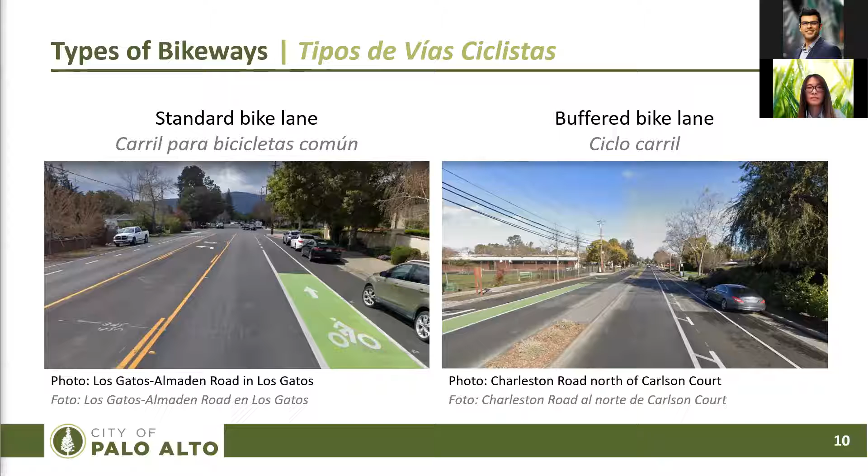The next potential treatment is a protected bike lane, sometimes referred to as cycle track. This provides a space for bicycles.

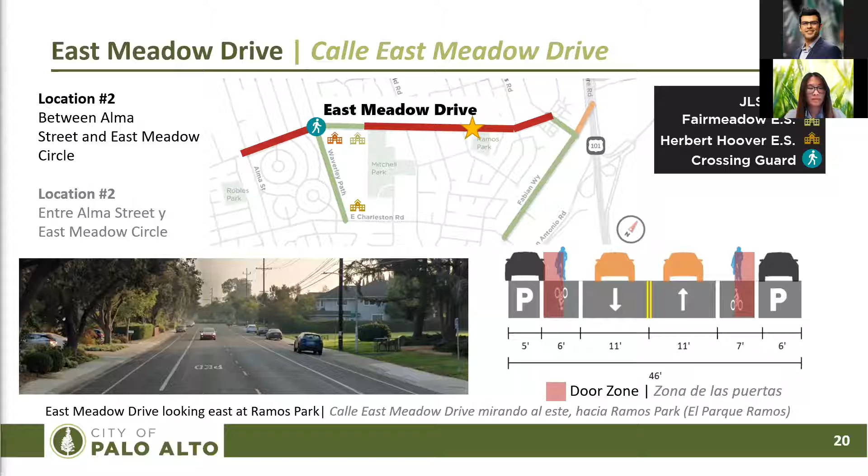Hay que tener en cuenta que, según la opinión de la comunidad, la ubicación del aparcamiento podría cambiar de una manzana a la otra. En Palo Alto se ha utilizado el estacionamiento en un lado de la calle para dar cabida a las instalaciones para bicicletas en la avenida California, cerca del túnel de Avenida Cal, y en la avenida Colorado, en el centro de la ciudad.

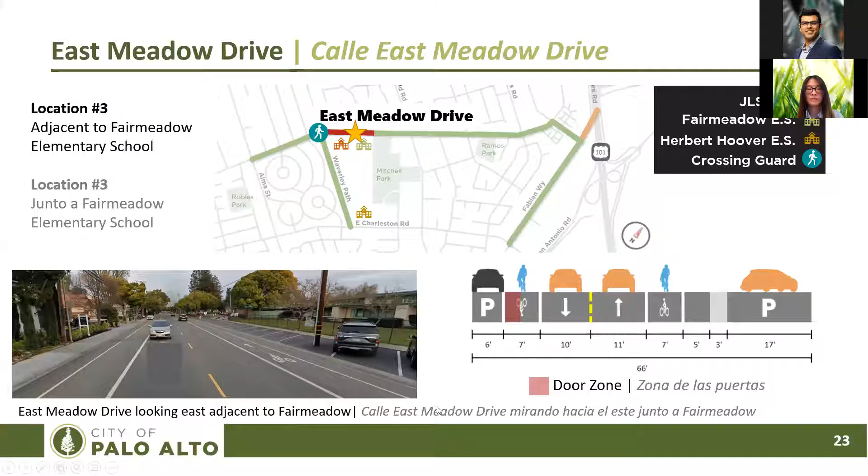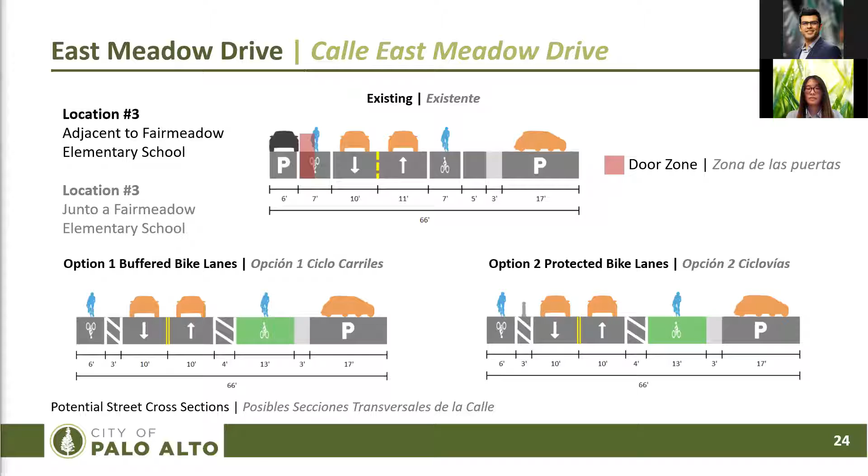Les mostramos aquí las mismas opciones, pero desde otro punto de vista. La imagen de abajo a la izquierda muestra los bolardos, así como los buffers en el carril bici, en el que los automovilistas deben cruzar para aparcar. La segunda opción muestra una ciclovía en dirección oeste con bolardos, y en ambas opciones mantienen el acceso de bucle de recogida y devolución de los estudiantes frente a la escuela. En la segunda opción, abajo a la derecha, hay puestos de estacionamientos junto al bucle de recogida y entrega.

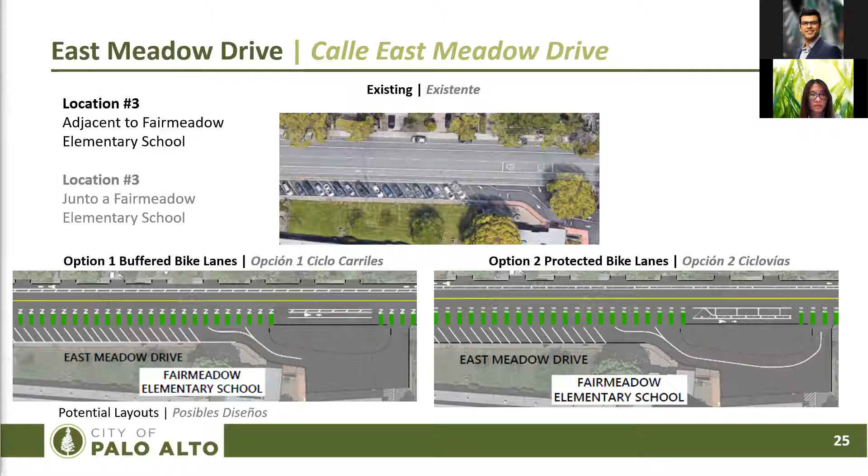Nuestro último segmento en nuestro paseo virtual es el sendero multiusos de Waverley, que conecta East Meadow con East Charleston, junto a las escuelas de JLS y Herbert Hoover. El sendero existente está lleno de baches, con superficies irregulares en algunos lugares, debido a la intrusión de las raíces de los árboles.

Justo al lado del sendero también hay actualmente una valla que puede interferir con el manillar de las bicicletas. Estos dos problemas han dado lugar a caídas y colisiones para los estudiantes en bicicleta.

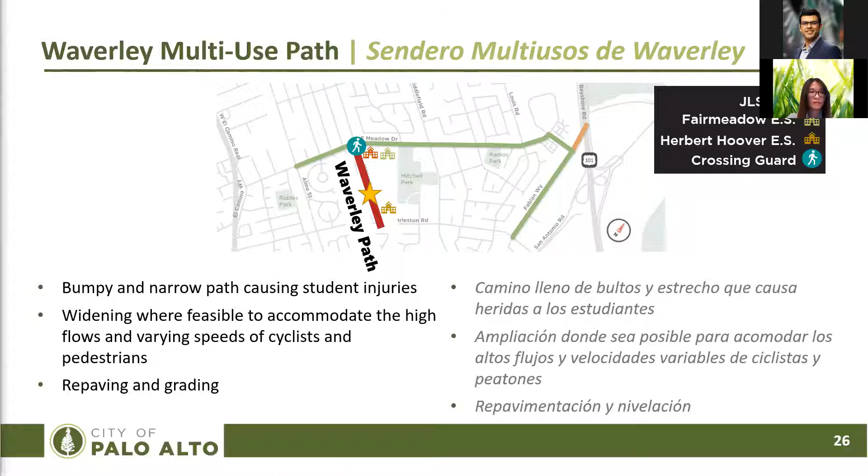El actual sendero multiusos de Waverley tiene baches y superficies irregulares en algunos lugares debido a grietas y las intrusiones de raíces de árboles, como pueden ver en las fotos. Además, justo al lado del sendero hay una valla que puede interferir con los manillares de las bicicletas. Estos problemas, combinados con la alta demanda durante los periodos de máxima afluencia escolar, han provocado caídas y colisiones de estudiantes en bicicleta.

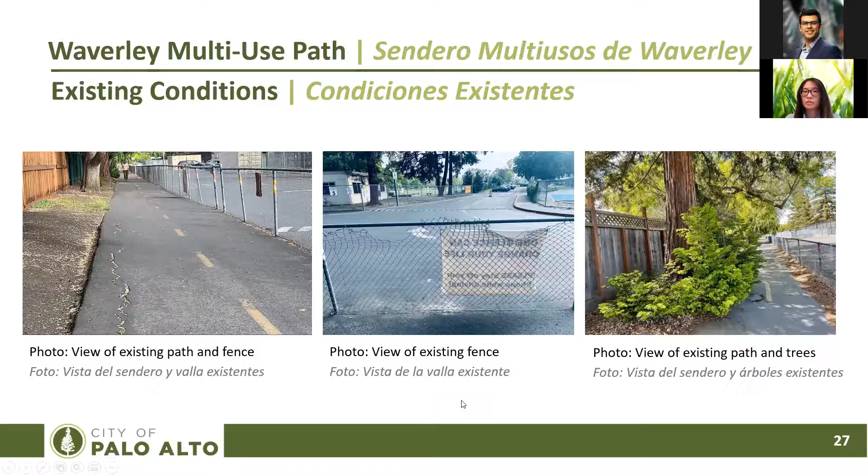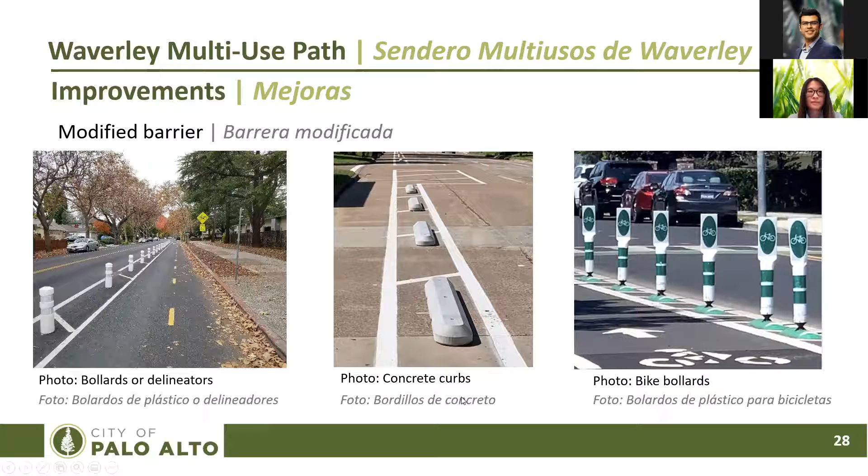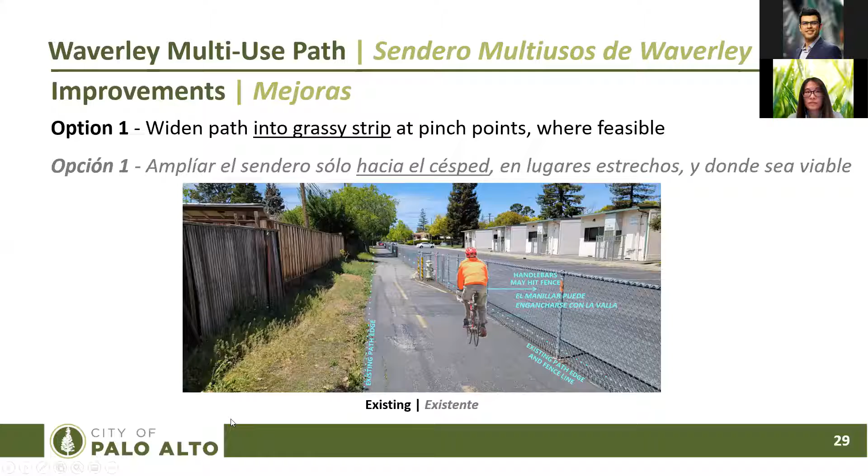Una forma de abordar algunas de las preocupaciones existentes sería eliminar la valla y sustituirla por otro tipo de barrera. Dado que la actual valla está a la altura del manillar, su sustitución por algo más corto mejoraría la experiencia de los ciclistas. La primera opción para las mejoras del sendero multiusos de Waverley consistiría en ensanchar el sendero hacia la franja de hierba que se aleja de la escuela.

Que está al otro lado de la escuela, cuando sea posible, para dar cabida a flujos mayores. La repavimentación y el rectificado del sendero también podrían proporcionar una superficie más suave, especialmente en los puntos estrechos como junto a la boca de incendios que se muestra aquí. La ampliación del sendero permitiría más espacio para los ciclistas.

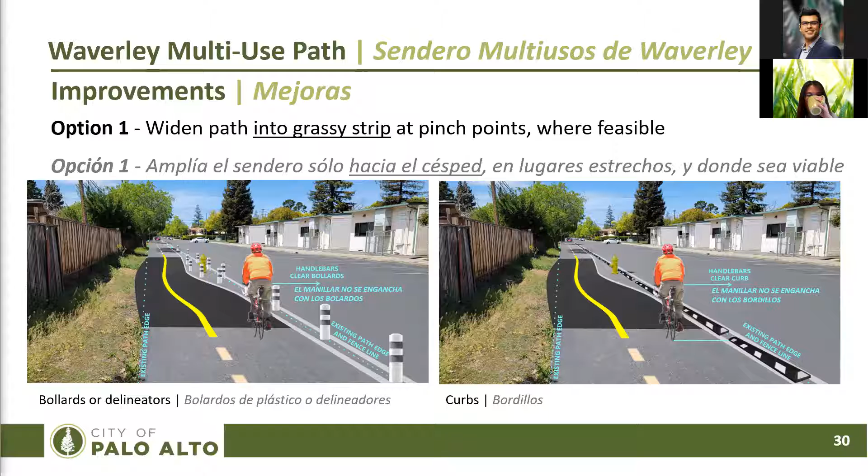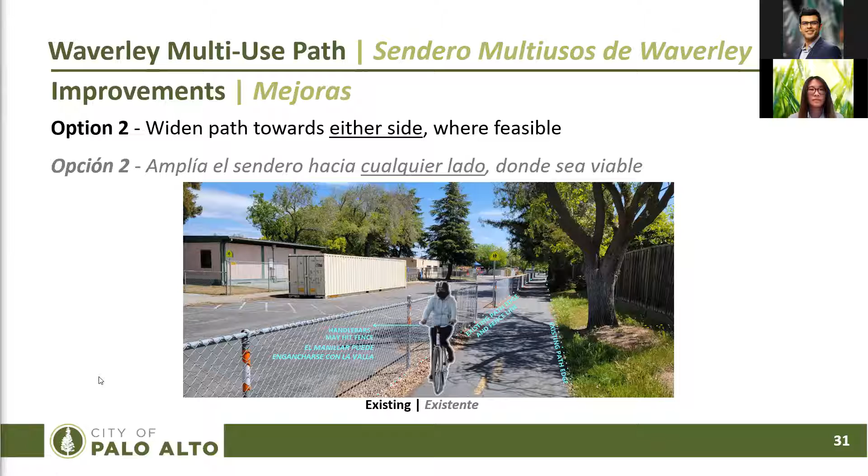Esta imagen muestra el sendero existente junto a los árboles en una zona un poco más al sur que la imagen anterior. En lugares como este no sería factible ampliar el sendero hacia la franja de hierba sin afectar a los árboles y la vegetación existente, por lo que no se podría ampliar el sendero hacia las franjas de hierba en lugares como estos.

Con lo cual hay otra opción para las mejoras del sendero multiusos de Waverley. La segunda opción consistiría no solo en ensanchar el sendero hacia la franja de hierba de forma similar a la opción 1, sino que también consistiría en ensanchar el sendero hacia la propiedad del colegio cuando sea posible, para dejar espacio adicional junto a los árboles y la vegetación existente.

Como se ve en estas dos simulaciones, la segunda opción seguiría permitiendo ensanchar el sendero hacia la franja de hierba donde haya espacio disponible lejos de los árboles y la vegetación. Pero la separación entre el sendero y la circulación de vehículos se desplazaría en algunos lugares para permitir el ensanchamiento en todo el sendero. Si se desea, cualquier modificación del sendero hacia la propiedad escolar requeriría la coordinación con el Departamento de Bomberos y el Distrito Escolar.

Al igual que con la opción 1, estas dos simulaciones muestran el aspecto que tendría el sendero con bolardos de plástico o separadores de tramos de acera reflectantes. Pero también podrían considerarse otros materiales. Estas barreras también son más cortas y reducirían los conflictos con los manillares de los ciclistas.

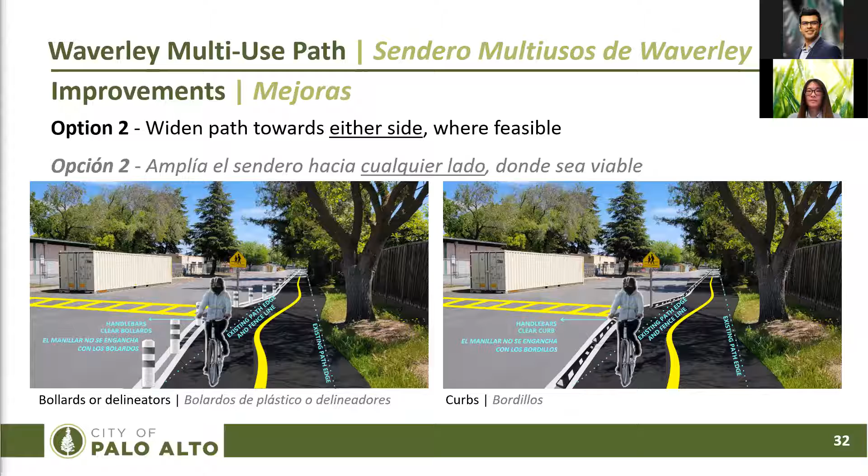Entonces, ¿cuáles son los siguientes pasos? Dedicamos un minuto a repasar los próximos pasos y qué otras oportunidades tendrán todos ustedes de compartir sus opiniones.

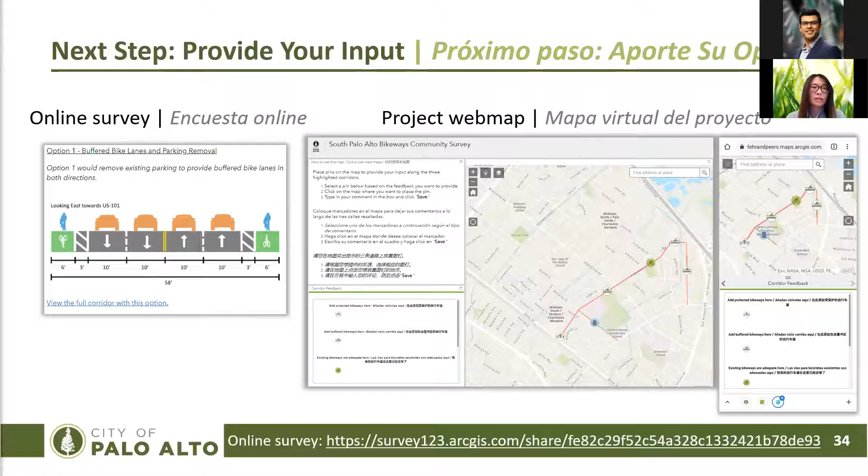The first and second question, I guess it's part one and part two, but are there any studies on parking utilization? La primera pregunta es, ¿hay estudios sobre las tasas de utilización del estacionamiento en Fabian Way y estudios de estacionamiento para todos los demás segmentos?

So right now, what we're calling the first phase of community engagement, we are sharing preliminary ideas of what each corridor could look like. A goal of this community engagement is to get your feedback on where a protected bikeway makes most sense and also the community's general support for the project. We anticipate bringing all the feedback to PTC and Council in July and August. If Council directs us to move forward with the project, parking studies and engagement focused around parking will be done in the next phase.

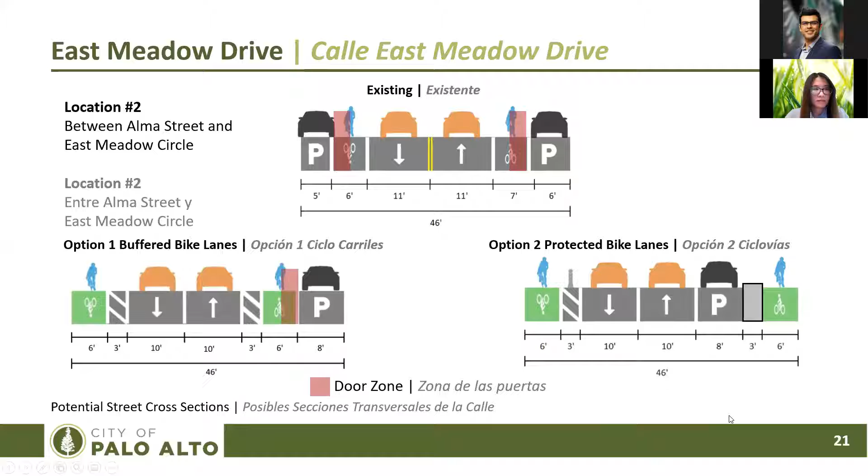Let's see. There are a couple, I guess these are more like comments. So some people are having difficulties accessing the survey. Hemos visto que hay gente poniendo comentarios que están teniendo problemas accediendo a la encuesta y les pedimos disculpas por eso. Por favor, si están teniendo problemas, envíen un correo electrónico a la Office of Transportation de la ciudad de Palo Alto.

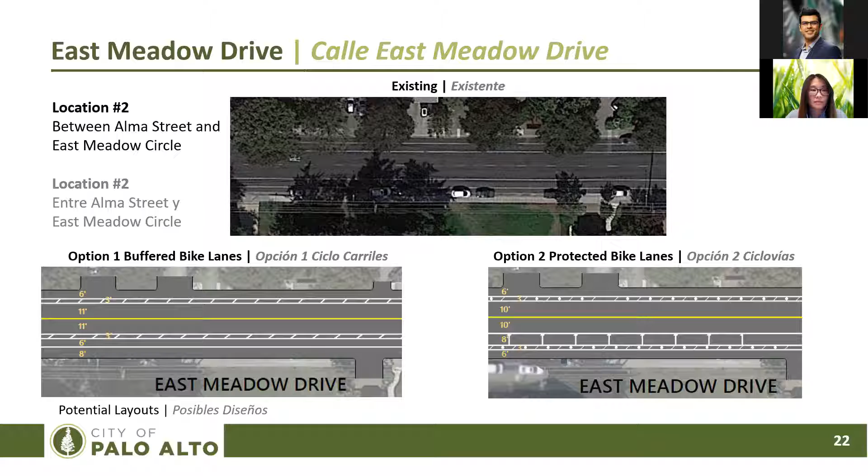How many people have completed the survey? La siguiente pregunta es ¿cuánta gente ha respondido a la encuesta hasta ahora? Y todavía no lo sabemos, pero responderemos si podemos encontrar la respuesta antes del final del webinar de hoy, la sesión de hoy.

La siguiente pregunta es si vamos a enviar un enlace a la encuesta a las personas que se han inscrito a la reunión de hoy.

I'm just giving Ingrid a minute. I wasn't sure if she needed to translate that into Spanish.

Okay, so this survey has been blasted out a few different ways. We have had email blasts to, I'm sure, most of you on it. It's also being advertised on our project website and via most of our social media. La respuesta es que hemos enviado el link a la encuesta a través de correo electrónico, por nuestros Facebook y todas las plataformas de redes sociales como Facebook y Twitter, y también lo pondremos en el chat ahora para que todo el mundo tenga acceso, y está disponible en la página web de la ciudad.